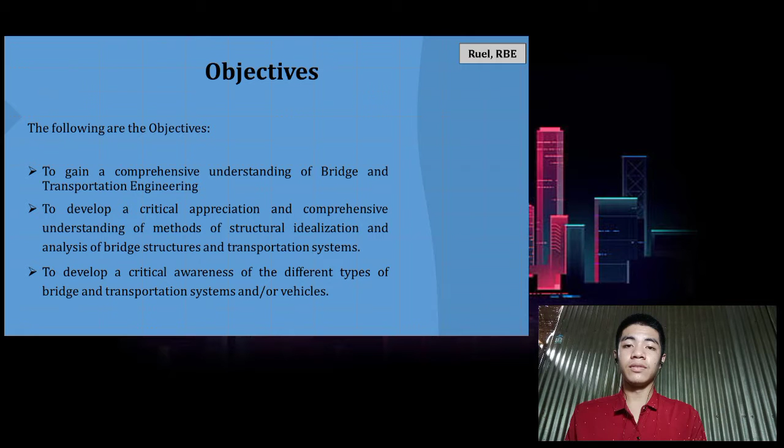Our discussion is all about bridge and transportation engineering, the two subdisciplines of civil engineering. Our objective is to gain a comprehensive understanding of bridge and transportation engineering, to develop a critical appreciation and comprehensive understanding of methods of structural idealization and analysis of bridge structures and transportation systems, and to develop a critical awareness of the different types of bridge and transportation systems and vehicles.

This is the outline of our topic. First, we will talk about bridge engineering: its definition and importance, the types of bridges, and the forces that influence different bridge designs. Second, we have transportation engineering: we will discuss its importance and definition, the transportation systems, and the different branches of transportation engineering.

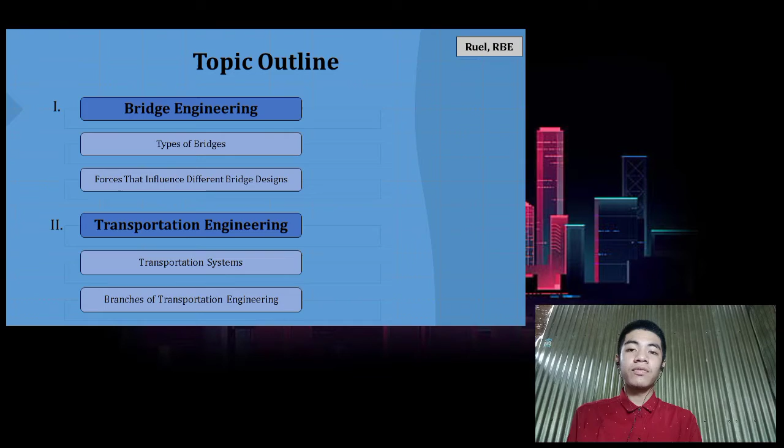Within the broad field of civil engineering, there are several subdisciplines. Bridge and transportation engineering are two of those subdisciplines. Bridge engineering is a civil engineering discipline that falls under structural engineering, but it is also related to transportation engineering because it entails the planning, designing, construction, operation, and maintenance of bridges to ensure the safe and efficient transportation of vehicles, people, and goods. In this report, we will discuss further these two subdisciplines under the field of civil engineering.

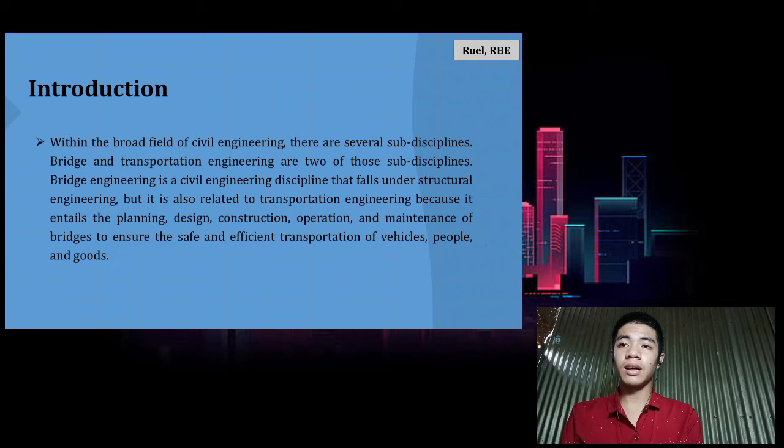We will provide the meaning, importance, and other relevant information about bridge and transportation engineering. At the end of this report, you will find out the benefits we gained from these subdisciplines of civil engineering and the impacts they brought to our society and to the world. There are also learning activities provided after the discussion to assess your learning.

First, let's talk about bridge engineering, its definition, purpose, and how these bridges, constructed and designed, help us in our daily lives. One of the disciplines of civil engineering is bridge engineering, which involves the planning, design, construction, operation, and maintenance of bridges to ensure safe and effective transportation of vehicles, goods, and especially people.

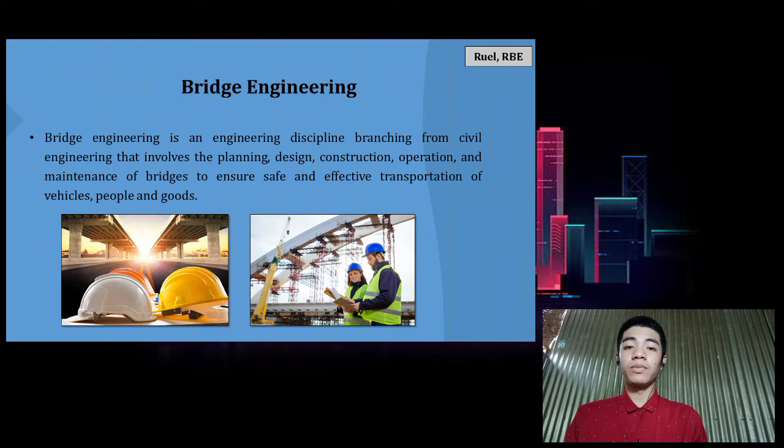Designing and maintaining bridges is no easy work. That's why it is important and required for bridge engineers to have skills such as analytical thinking, supervisory skills, organization, and creativity. Bridges play an important key role in our lives, connecting our communities, promoting commerce and travel, and contributing to our country's economic development. That's why it is important that bridges are built safely and correctly for effective use.

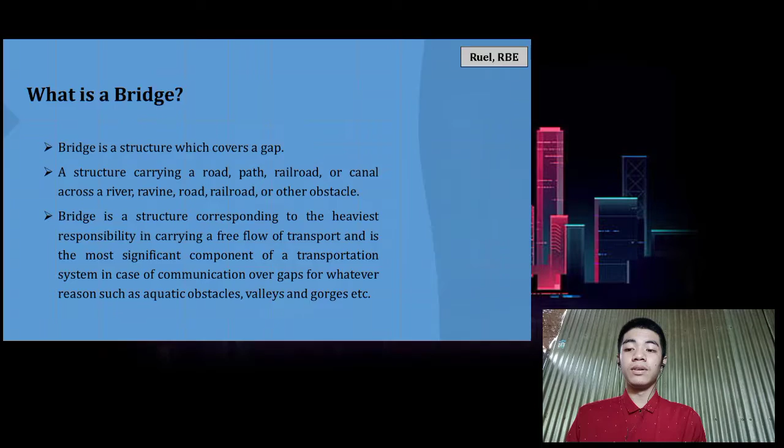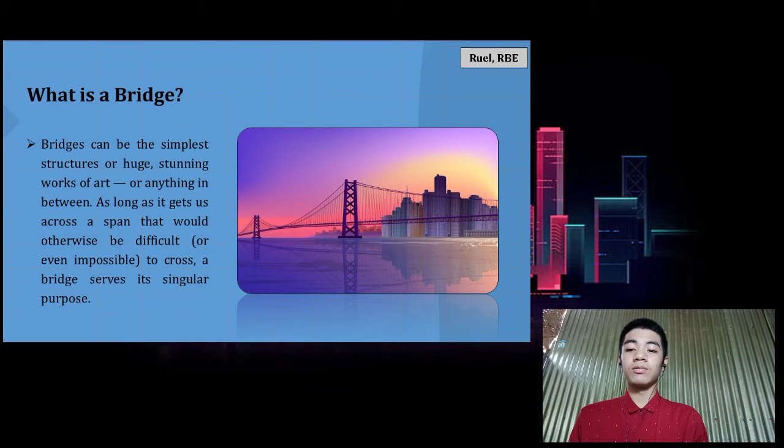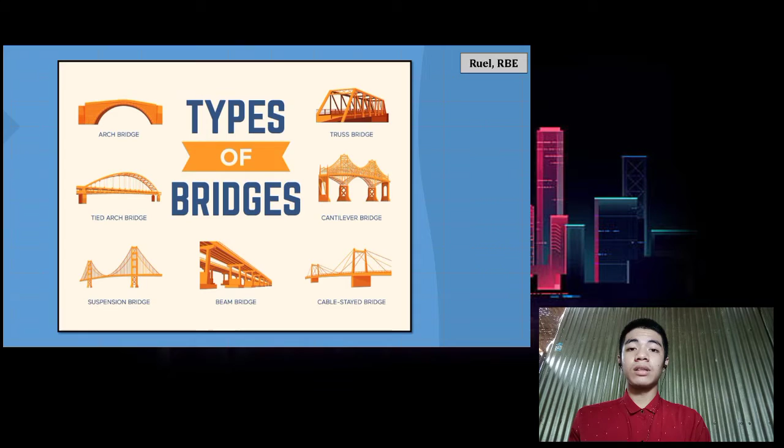Now, let's go on to the different types of bridges. Let's find out how they differ in structure, purposes, and how they work.

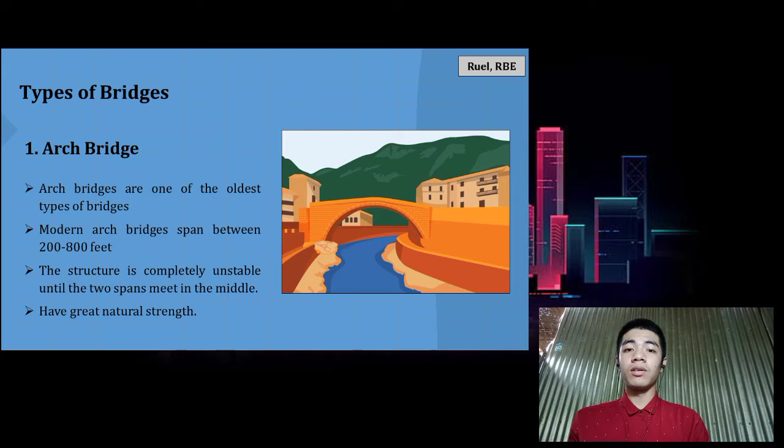First, we have the arch bridge. It is the oldest among the types of bridges and it is commonly used during ancient times. It usually spans between 200 to 800 feet. The basic principle of the arch bridge is its curved design, which does not push load forces straight down, but instead they are conveyed along the curves of the arch to the support at its end.

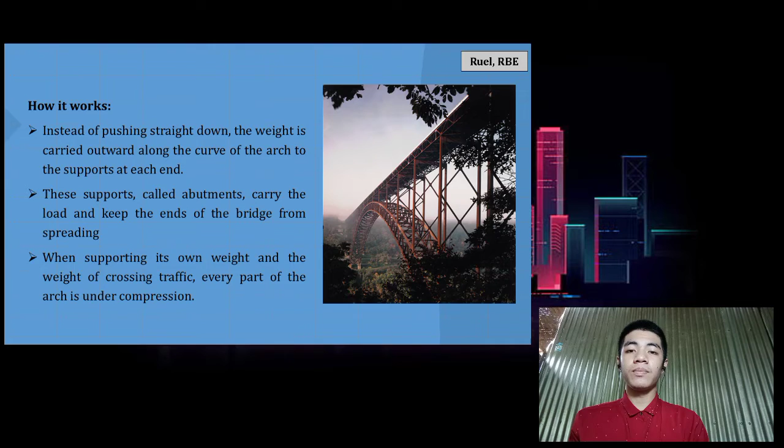The supports are called abutments, which carry the load and keep the ends of the bridge together, and every part of the arch is under compression. The pictures shown are examples of arch bridges: the New River Gorge Bridge, located in Fayetteville, West Virginia, and the Alcantara Bridge in Extremadura, Spain.

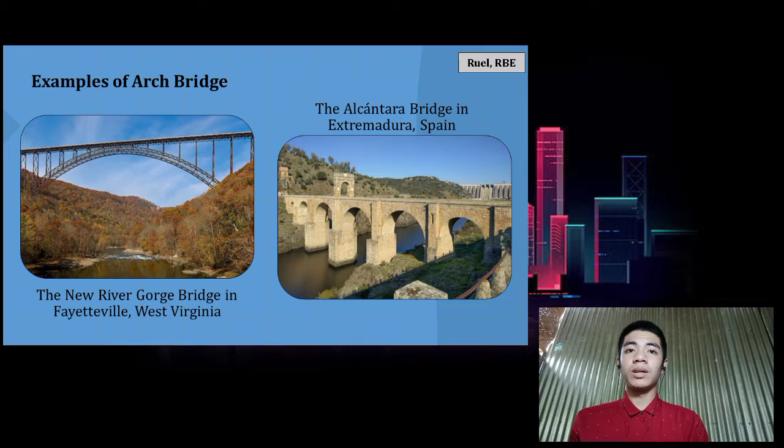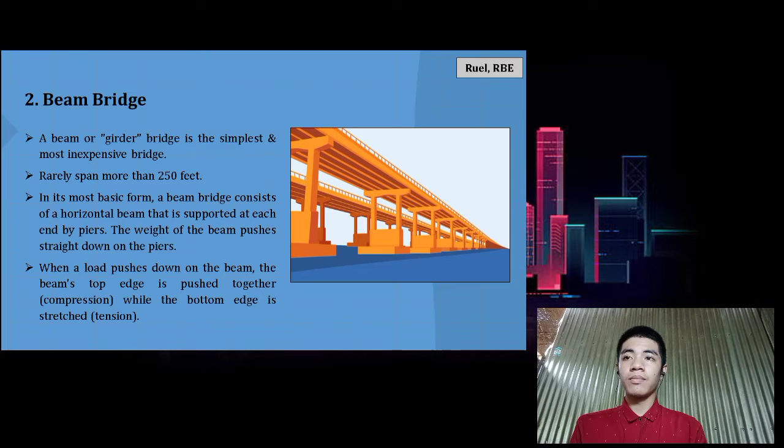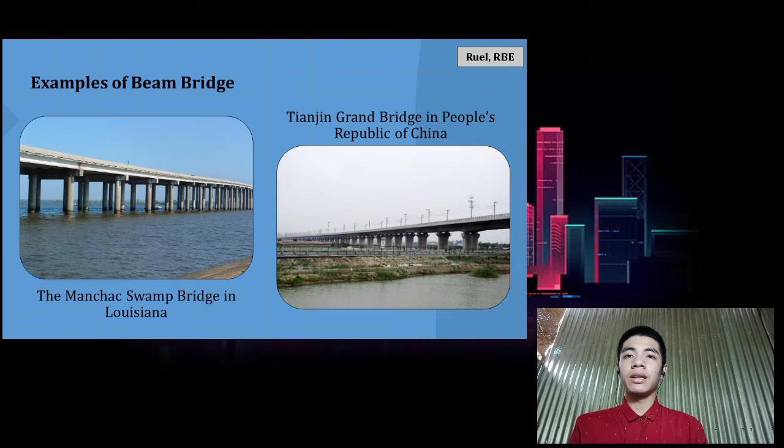The second type of bridge is called the beam bridge, which is the simplest and most economical bridge, rarely spanning more than 250 feet. It consists of a horizontal beam supported at each end by a pier, and the weight of the beam pushes straight down to the piers. The top edge compresses when the load pushes down on the beam, and the bottom edge stretches. Examples of beam bridges are the Manchac Swamp Bridge in Louisiana and the Tianjin Grand Bridge in China.

Next, we have the third type of bridge, the cantilever bridge. It has two cantilever arms. A cantilever is a rigid structural element that extends horizontally and is supported at only one end. These cantilever arms extend from opposite sides of an obstacle that has to be spanned and meet at the center.

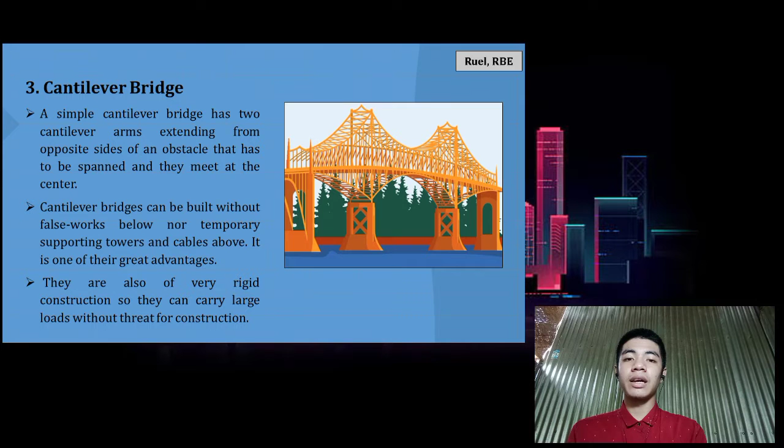One of the advantages of building this type of bridge is that it can be built without falseworks, temporary supporting towers, and cables above. In addition, these are constructed very rigid so that it can carry large loads without threat to construction. An example of this type of bridge is the Forth Bridge in the east of Scotland and the Quebec Bridge in Canada.

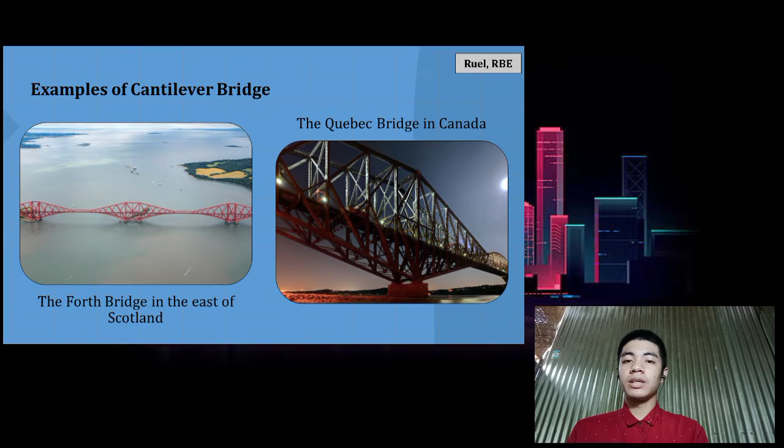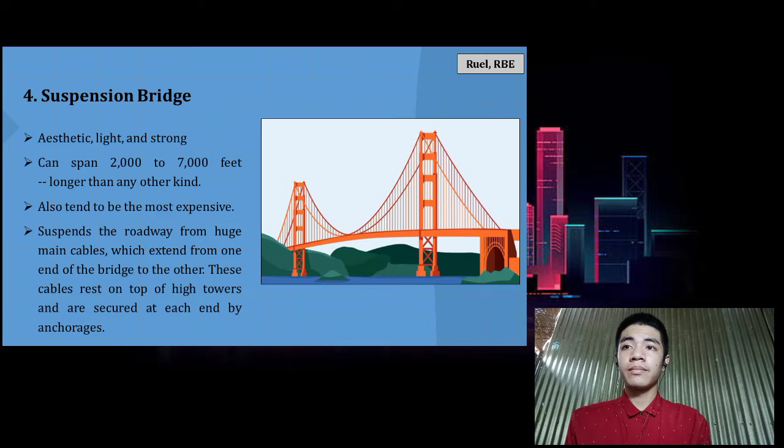Now let's move on to the aesthetic, light, and strong type of bridge, known as the suspension bridge, that can span longer than any other kind, with 2,000 to 7,000 feet, but it is the most expensive among the types.

As you can see, there are cables that extend from one end of the bridge to the other. The cables on the top of the high towers are secured at each end by the anchorage. The cables are made of thousands of individual steel wires, which are preferred because they are very strong under tension.

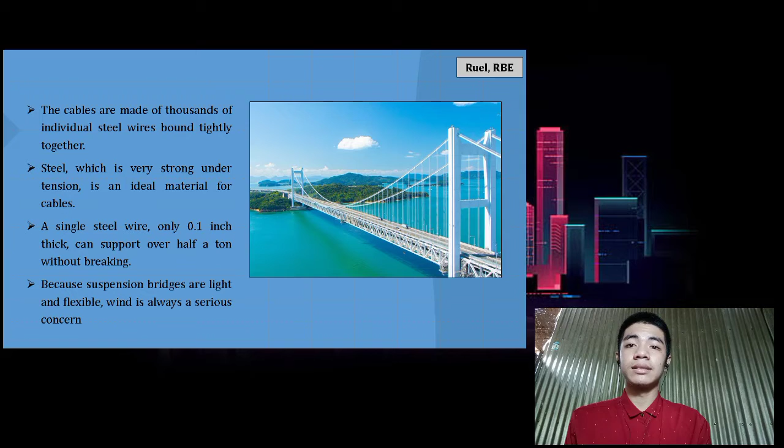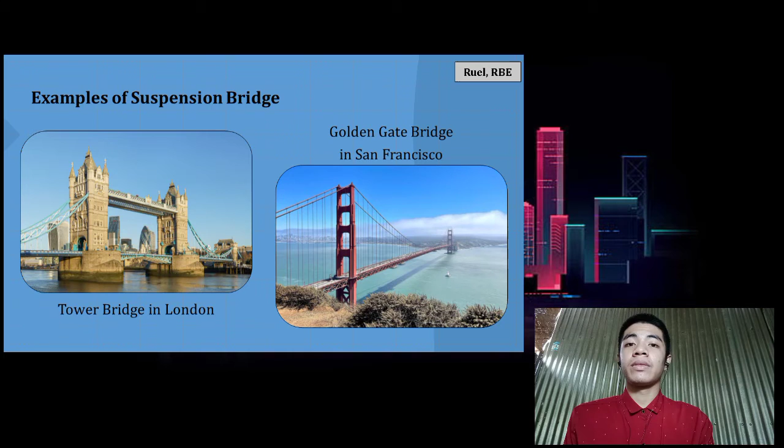The disadvantage of this type of bridge is its flexibility and lightness, which is why wind is always a concern. Examples of this type are the Tower Bridge in London and the Golden Gate Bridge that can be found in San Francisco.

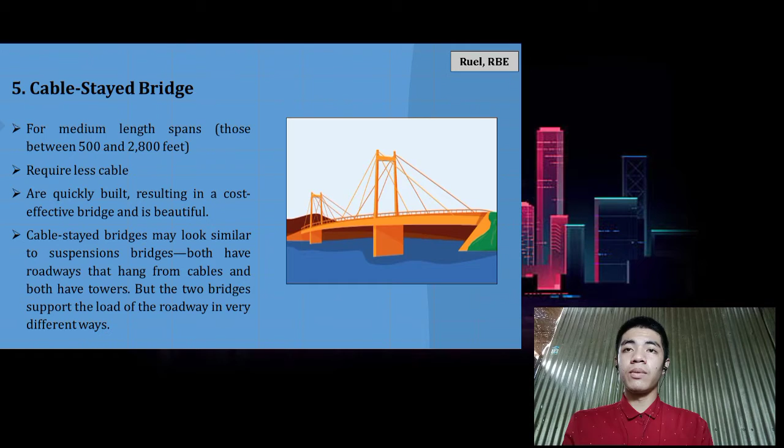The fifth type of bridge is the cable-stayed bridge, which requires less cable. It spans between 500 and 2,800 feet, is quickly built, resulting in a cost-effective bridge. You'll notice that they may look similar to the suspension bridge, but they differ in how they support the load of the roadway.

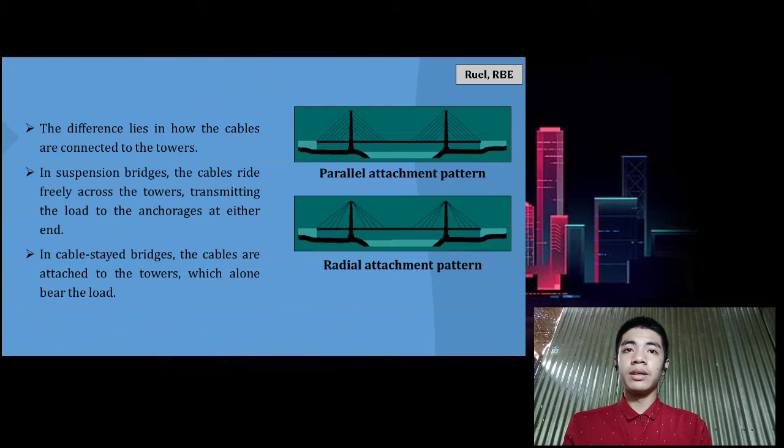The suspension bridge's cable rides freely across the towers and transmits load to the anchorage at either end, whereas the cable in a cable-stayed bridge is attached to the towers, which alone bear the load. Examples are Russia's Russky Bridge and the Sutong Yangtze River Bridge in China.

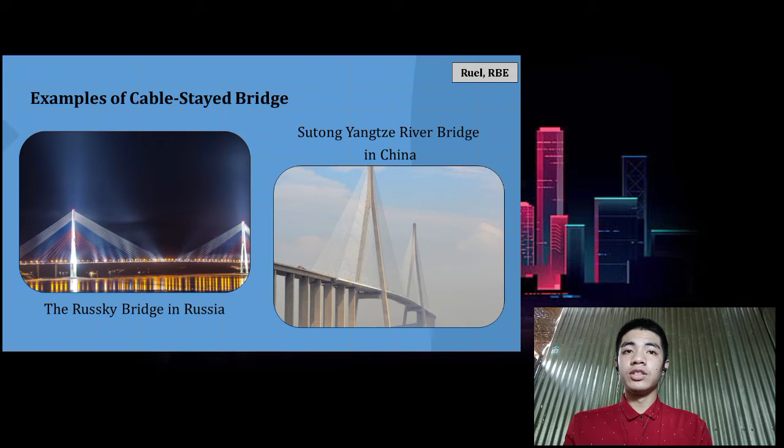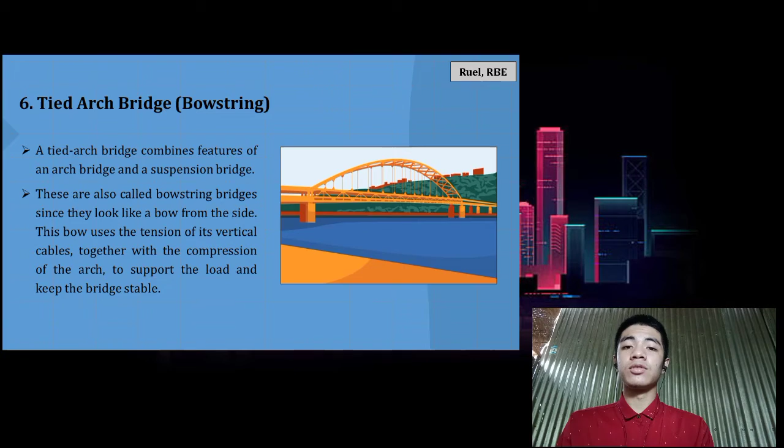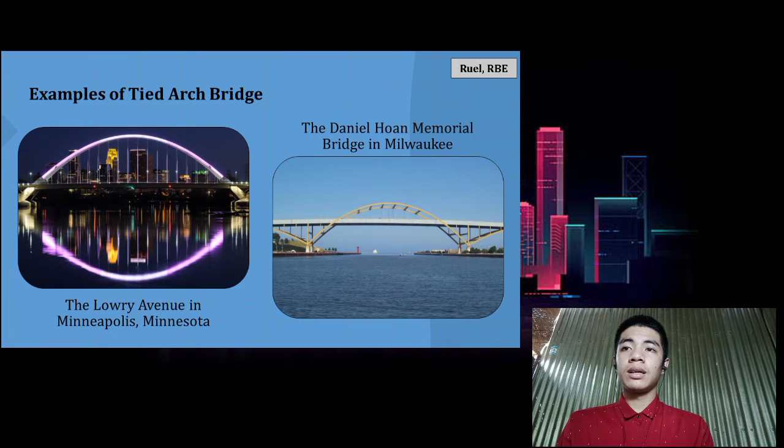Then we have the sixth type of bridge, the tied arch bridge, or the bowstring. It looks like a bow from the side, and this bow uses the tension of its vertical cables together with the compression of the arch supporting the load to keep the bridge stable. The tied arch bridge, as you notice, is a combination of arch and suspension bridge because of how it is formed. Examples of these are the Lowry Avenue Bridge located in Minneapolis, Minnesota, and the Daniel Hoan Memorial Bridge in Milwaukee.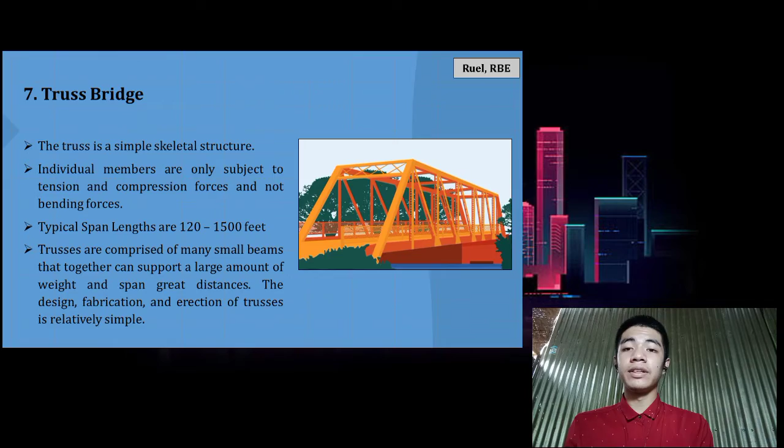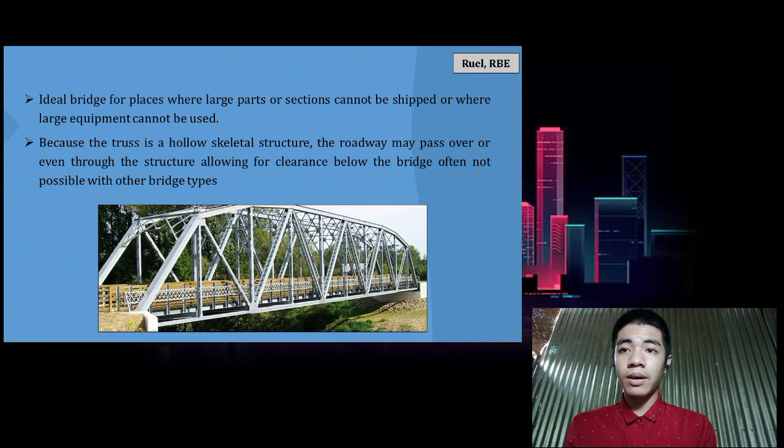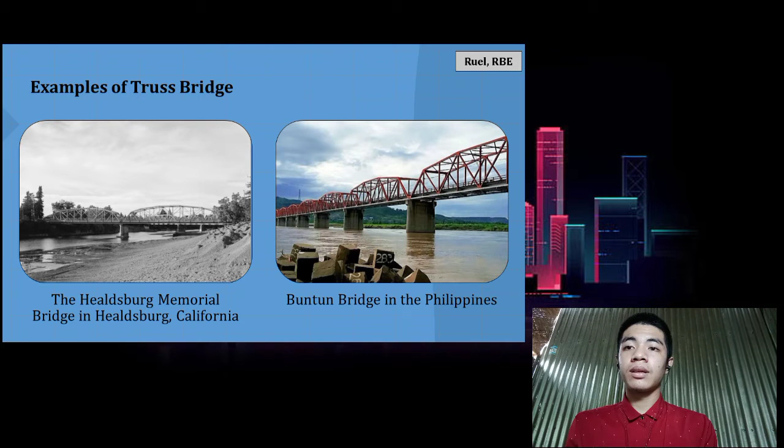It is the ideal bridge for places where large parts or sections cannot be used, and because of its structure, the roadway may pass over or even through the structure for clearance below the bridge. Examples are the Healdsburg Memorial Bridge and Buntun Bridge, located here in the Philippines.

We are done identifying the different types of bridges. Now let's talk about the forces that influence different bridge designs. Bridge designs are based on more than aesthetics; there are natural forces to be considered in how the bridges will be designed, aside from topographical and logistical conditions of the location where the bridges will be built.

The forces of nature that act upon bridges are gravity, load, compression, tension, torsion, shear, and vibration or resonance.

First, we have gravity. Gravity has the most profound impact on the bridge. Gravity is constant; no matter what the other conditions are, gravity is always acting on the structure, trying to pull it down. Unlike buildings, homes, or skyscrapers that have ground where the building is built, bridges have no ground beneath them

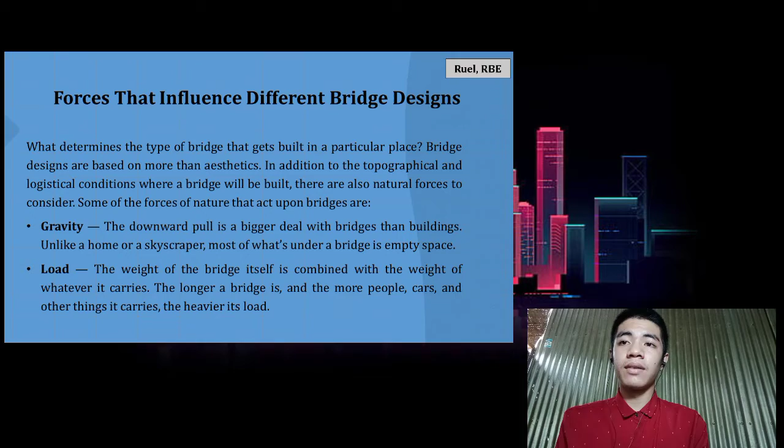Next is compression, the pushing force that creates inward movement toward the center and helps other types of bridges, such as the arch bridge, stand. But when too much compression is applied, the bridge may buckle.

Then we have tension, the pulling force that creates outward movement from the center. An example of a bridge type that applies more tension is the suspension bridge. Too much tension may also cause the bridge to snap. And then there's torsion.

It is the twisting force caused by environmental forces like wind. It has the possibility to threaten the structure of a bridge. If the surface of the bridge twists enough while travelers are on it, they can be thrown off.

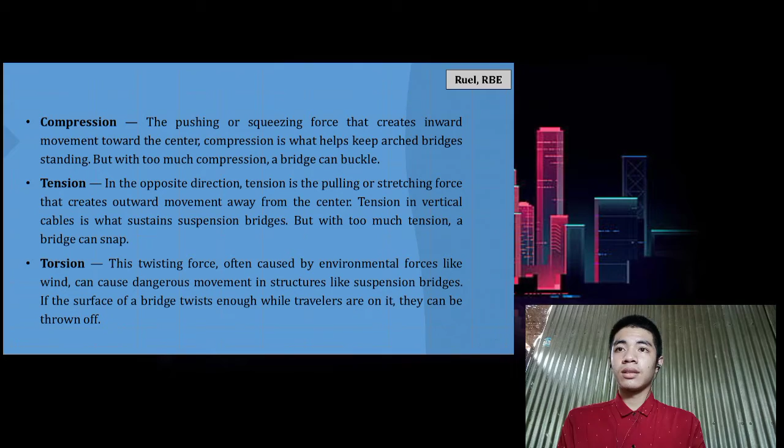And then we have shear. It is the force that imparts an effect on the horizontal plane. This usually occurs when forces from the environment put pressure in opposite directions on a single fastened part of a bridge.

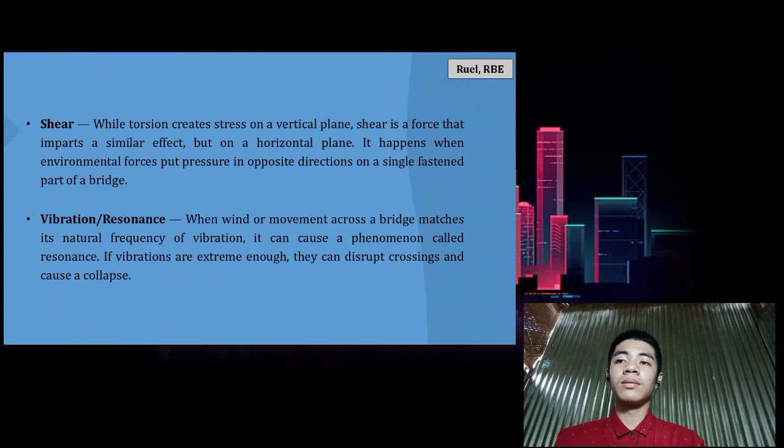And lastly, we have to consider vibration or resonance. Wind or movement across the bridge that matches its natural frequency and vibration will be able to cause resonance. In this, extreme vibrations can disrupt crossing and can possibly cause collapse in its structure.

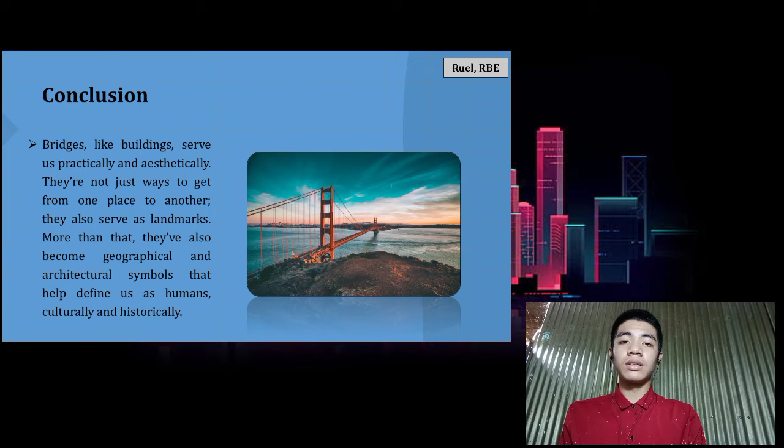In conclusion, bridges are not just there to be a way of getting from one place to another, but they can also become a landmark because of their astonishing scenery and historical background. They can also be geographical and architectural symbols that define us humans, culturally and historically.

So let's now move forward to transportation engineering. But before we proceed, let us first define what transportation is. Transport or transportation is the movement of people, animals, and goods from one location to another.

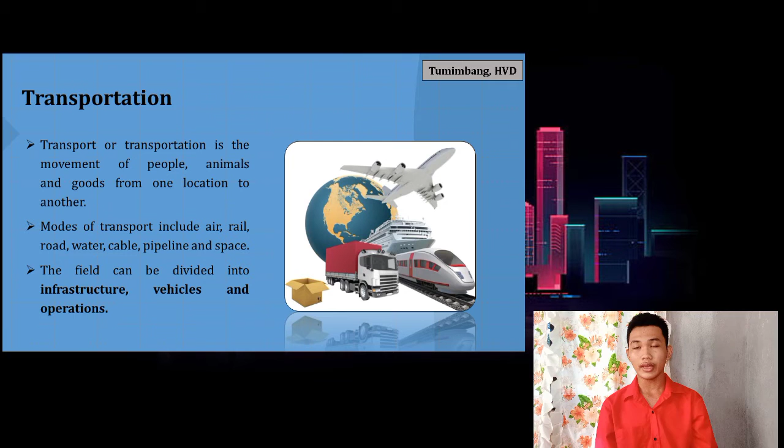Modes of transport include air, rail, road, water, cable, pipeline, and space. The field can be divided into infrastructure, vehicles, and operations. Why is transportation important?

Transportation is important because it enables trade between people, which is essential for the development of civilizations. Transport plays an important part in economic growth and globalization, but most types cause air pollution and use large amounts of land. While it is heavily subsidized by governments, good planning of transport is essential to make traffic flow.

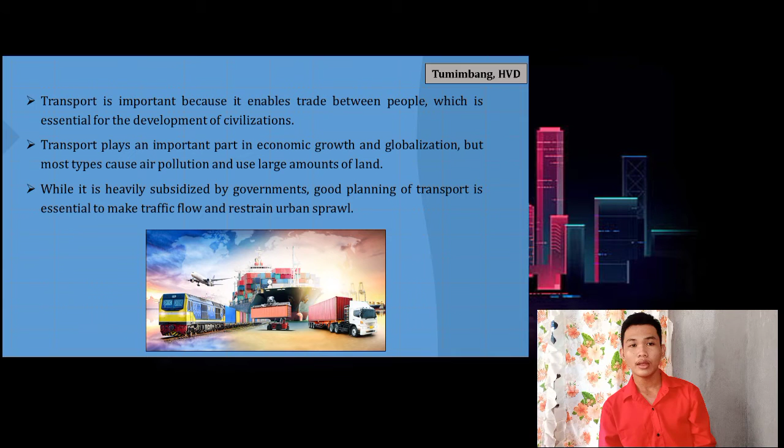And restrain urban sprawl. So what is urban sprawl? It is the rapid expansion of the geographic extent of cities and towns. That's why we need good planning of transport.

Now that we have an idea of what transportation is, let us move forward to our topic, which is transportation engineering. Transportation engineering is the application of technology and scientific principles to the planning, functional design, operation, and management of facilities for any mode of transportation, in order to provide for the safe, efficient, rapid, comfortable, convenient, economical, and environmentally compatible movement of people and goods.

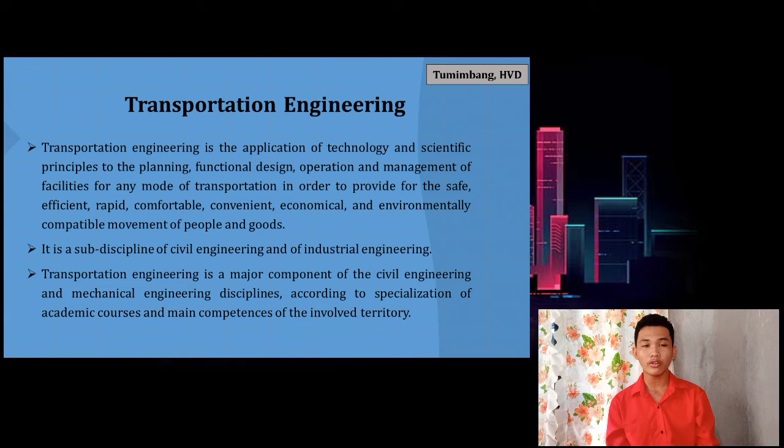It is a subdiscipline of civil engineering and of industrial engineering. Transportation engineering is a major component of the civil engineering and mechanical engineering disciplines, according to the specialization of academic courses and main competencies of the involved territory.

Transport infrastructure consists of fixed installations, including roads, railways, airways, waterways, canals and pipelines, and terminals such as airports, railway stations, bus stations, warehouses, trucking terminals, refueling depots, and seaports.

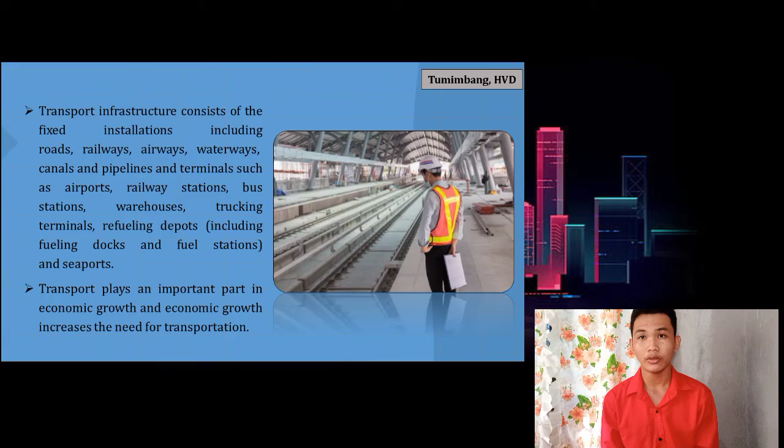Transport plays an important part in economic growth, and economic growth increases the need for transportation. Transportation systems can be defined as the combination of elements and their interactions which produce the demand for travel within a given area and the supply of transportation services to satisfy this demand. This definition is general and flexible enough to be applied to different contexts.

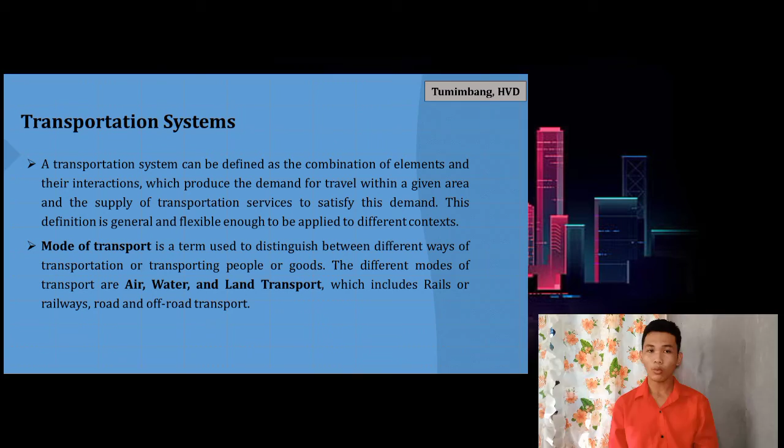There are three modes of transport: air, water, and land transport. Land transport covers all land-based transportation systems that provide for the movement of people, goods, and services.

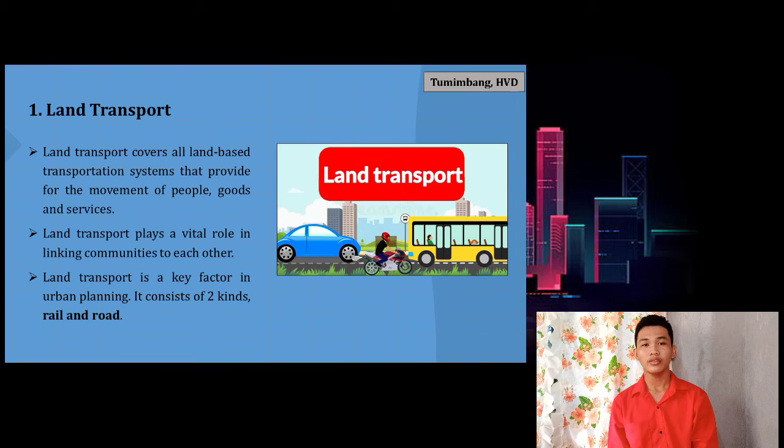Land transport plays a vital role in linking communities to each other. Land transport is a key factor in urban planning, and it consists of two kinds: rail and road. Rail transport is a means of conveyance of passengers and goods by way of wheeled vehicles running on a rail track, known as a railway or railroad. Examples of these are train, rail car, and rail bus.

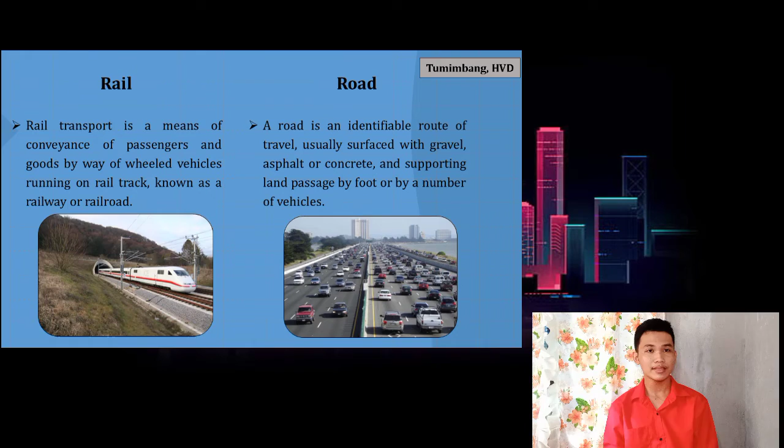Road: a road is an identifiable route of travel, usually surfaced with gravel, asphalt, or concrete, and supporting land passage by foot or by a number of vehicles. Examples of these are cars, trucks, buses, motorbikes, and bicycles.

The next mode of transport is water transport. Water transport is the process of transport that a watercraft, such as a ship or sailboat, makes over a body of water, such as a sea, ocean, lake, canal, or river.

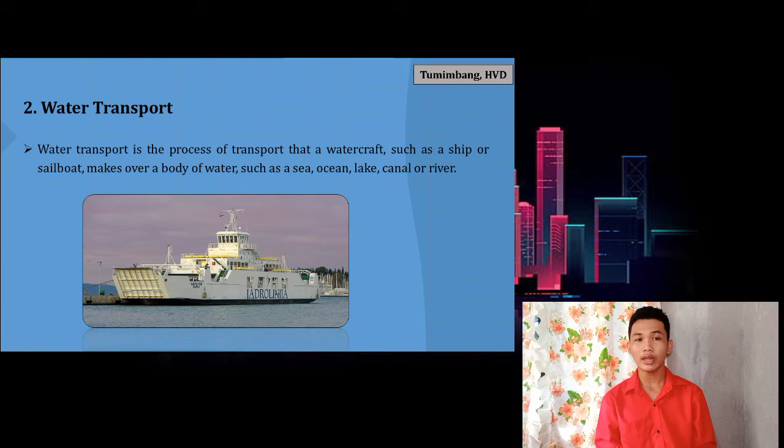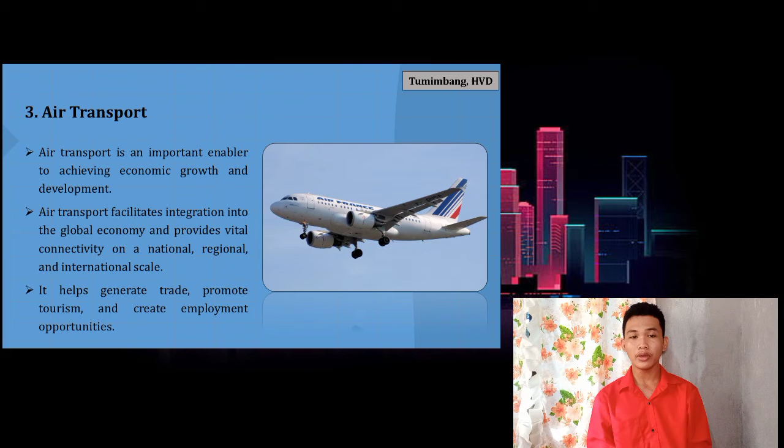And the last mode of transport is air transport. Air transport is an important enabler to achieving economic growth and development. Air transport facilitates integration into the global economy and provides vital connectivity on a national, regional, and international scale. It helps generate trade, promote tourism, and create employment opportunities.

Let us now move forward to the branches of transportation engineering. The main branches of transportation engineering are highway engineering, airport engineering, port and harbor engineering, traffic engineering, and infrastructure engineering.

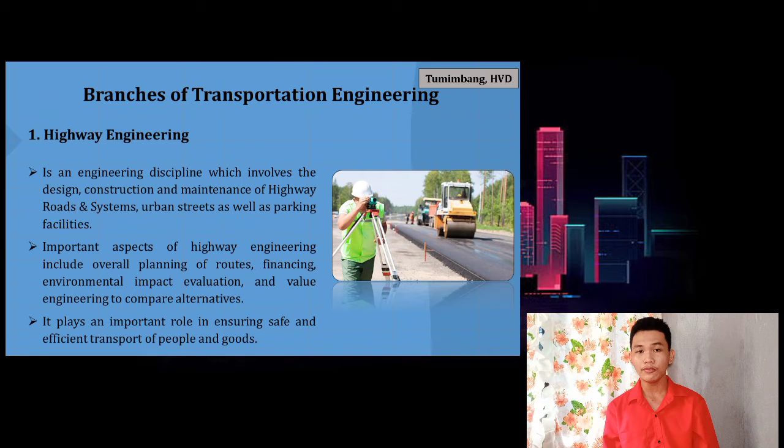Highway engineering is an engineering discipline which involves the design, construction, and maintenance of highway roads and systems, urban streets, as well as parking facilities. Important aspects include overall planning of routes, financing, environmental impact evaluation, and value engineering to compare alternatives. It plays an important role in ensuring safe and efficient transport of people and goods.

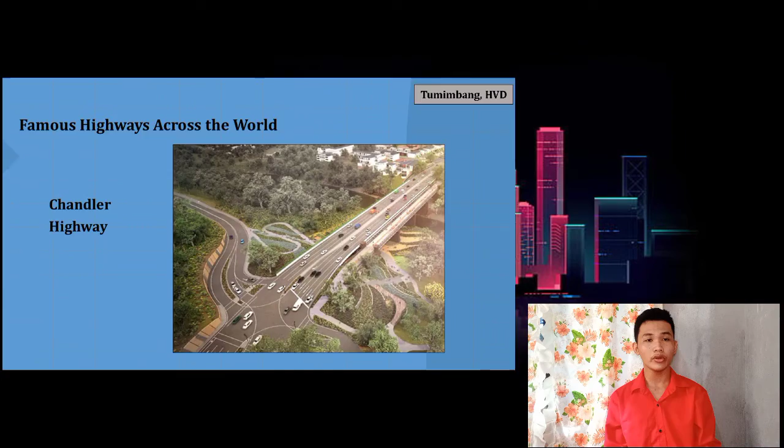Let us now look at the famous highways across the world. The Pan American Highway, which is the longest roadway in the world. Next is the Chandler Highway, the shortest highway in the world. Next is the Hana Highway, where you can find many waterfalls and attractions along the way. The Katy Freeway is the widest freeway in the world, with 26 total lanes.

Let's now move forward to the second branch of transportation engineering: airport engineering. Airport engineering is the design, building, and maintenance of an airport facility. Airports are designed to serve a number of roles. Key functions include providing runways for aircraft to take off and land, as well as terminals for the safe loading and unloading of passengers and cargo.

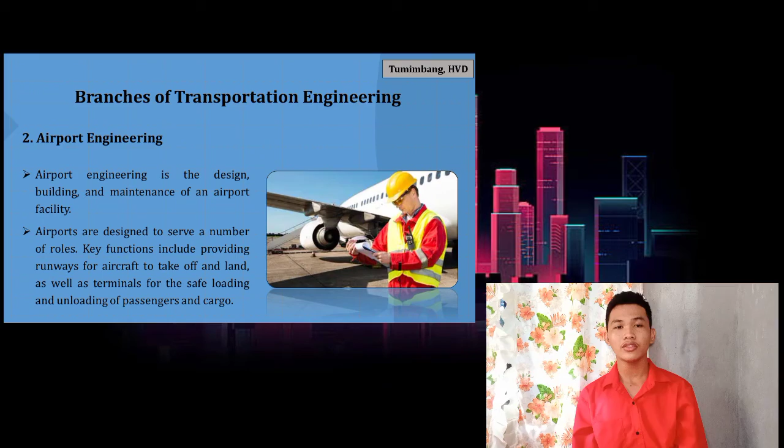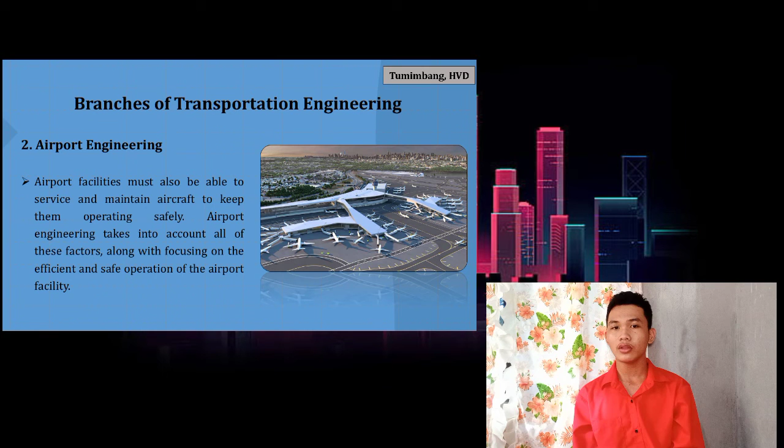Airport facilities must also be able to service and maintain aircraft to keep them operating safely. Airport engineering takes into account all of these factors, along with focusing on the efficient and safe operation of the airport facility. Let us now look at famous airports.

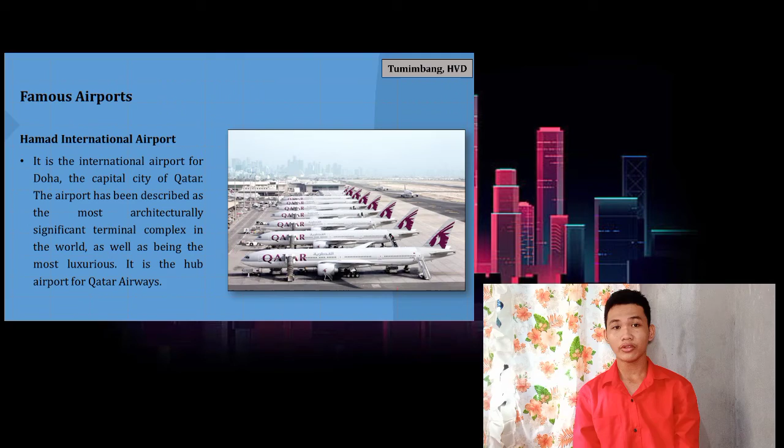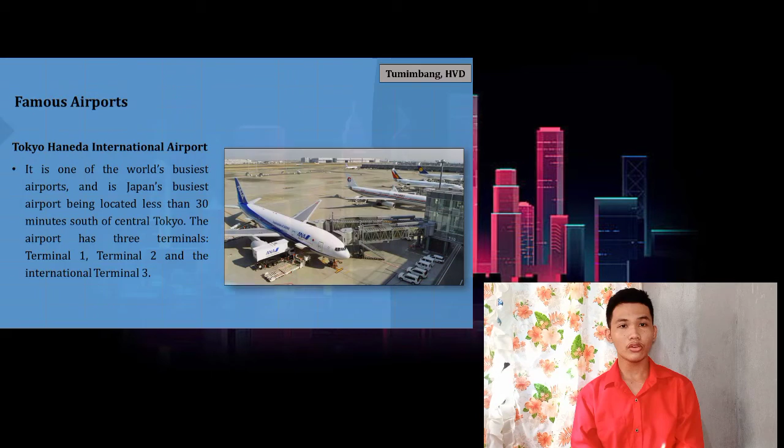The first one is the Hamad International Airport. It has been described as the most architecturally significant terminal complex in the world. Next is the Tokyo Haneda International Airport. It was the second busiest airport in Asia and the fourth busiest in the world in 2009.

Let us now move forward to the third branch of transportation engineering, port and harbor engineering. Port and harbor engineers handle the design, construction, and operation of ports, harbors, canals, and other maritime facilities. Port and harbor are often confused because they are both places used by ships and other water vessels. There are different functional aspects to each of these destinations.

A port is a commercial water facility used for ships and their cargo. A harbor is a place of safety for ships and other waterborne vessels. A harbor is a mooring place and offers safe anchorage for ships. Harbors and ports can be man-made or natural.

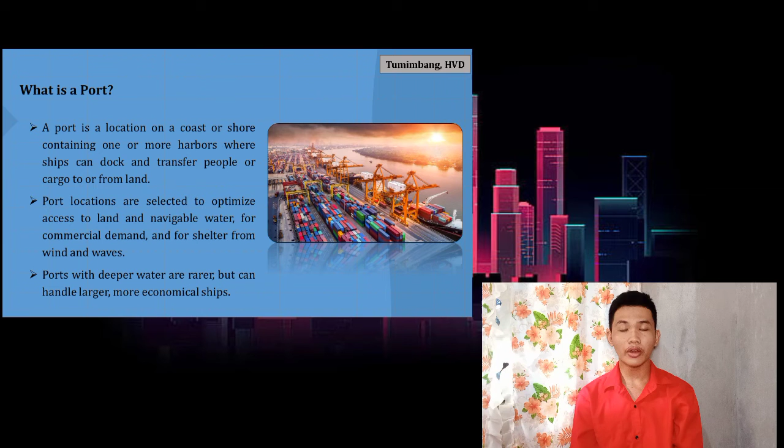Let us further discuss these two terms. What is a port? A port is a location on a coast or shore containing one or more harbors where ships can dock and transfer people or cargo to or from land. Port locations are selected to optimize access to land and navigable water for commercial demand and for shelter from wind and waves. Ports with deeper water are rarer but can handle larger, more economical ships.

A port is a place on the coast that facilitates loading and unloading cargo. A port is usually located inside a harbor. Ports often have cargo handling equipment such as cranes, which can be seen in the picture, and also forklifts for use in loading ships, which can be provided by private interests or public bodies.

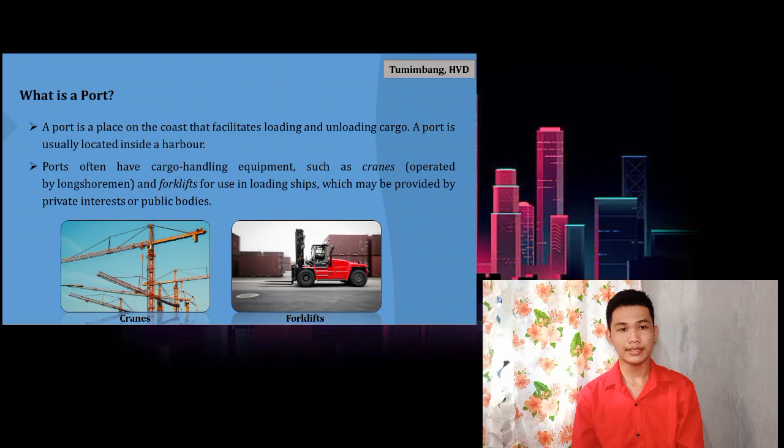What is a harbor? A harbor, also called a haven, is a body of water where ships, boats, and barges can seek shelter from stormy weather or else are stored for future use. A sheltered area of the sea in which vessels could be launched, built, or taken for repair, or could seek refuge in time of storms, or provide for loading and unloading of cargo and passengers.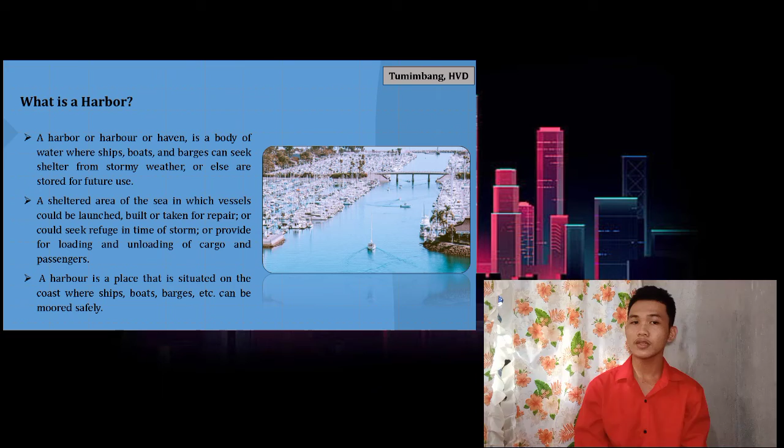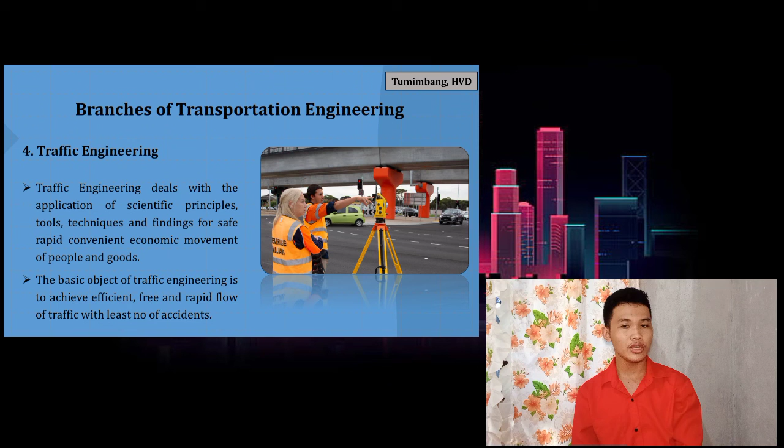Let us now move forward to the fourth branch of transportation engineering, traffic engineering. Traffic engineering deals with the application of scientific principles, tools, techniques, and findings for safe, rapid, convenient, economic movement of people and goods. The basic object of traffic engineering is to achieve efficient, free, and rapid flow of traffic with least number of accidents. Traffic engineers are professionally trained to look at the situation and identify the problem and its cause. They take traffic counts, look at speed data, analyze accident statistics, consider roadway conditions, and even conduct further research.

The last branch of transportation engineering is infrastructure engineering. Infrastructure engineering looks at the options and processes involved in designing transport infrastructure systems that are safe and sustainable. It is a professional engineering discipline that deals with the design, construction, and maintenance of the physical and naturally built environment, including works like roads, bridges, canals, dams, and buildings.